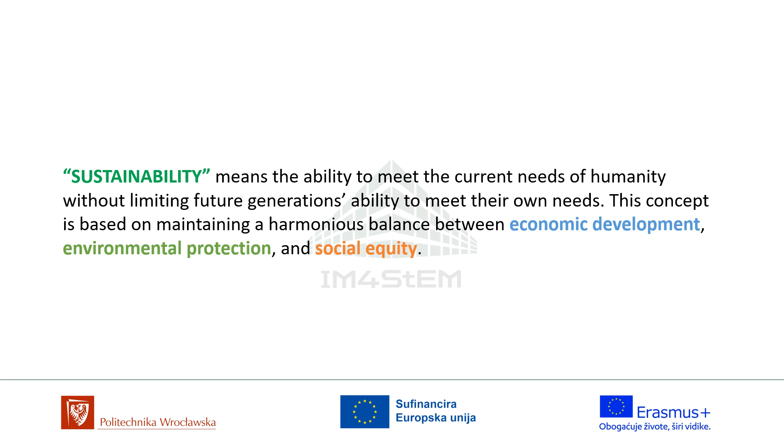Here you can see those three core pillars: the environmental, the economic, and the social pillar. As engineers, we sometimes fall into the trap of focusing exclusively on technical efficiency or environmental metrics. However, in the real world, a solution cannot survive unless all three aspects work in complete harmony. They are interconnected, and a weakness in one pillar directly undermines the success of the others.

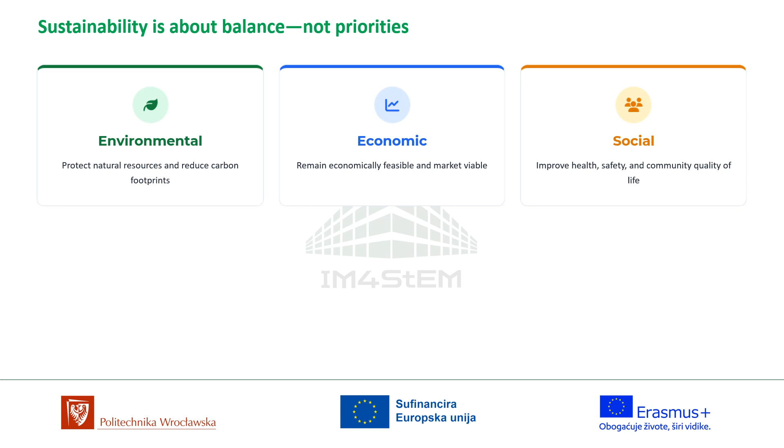To illustrate this, let's consider a real-world scenario. If we develop a material that is environmentally perfect, but it costs five times more than traditional options, the market will simply reject it. On the other hand, if we focus purely on economic profit, we risk devastating local ecosystems and running out of natural resources. Finally, a project that lacks social acceptance or community support will quickly run into regulatory and public resistance. That is why we must actively search for the sweet spot right at the intersection of all three spheres.

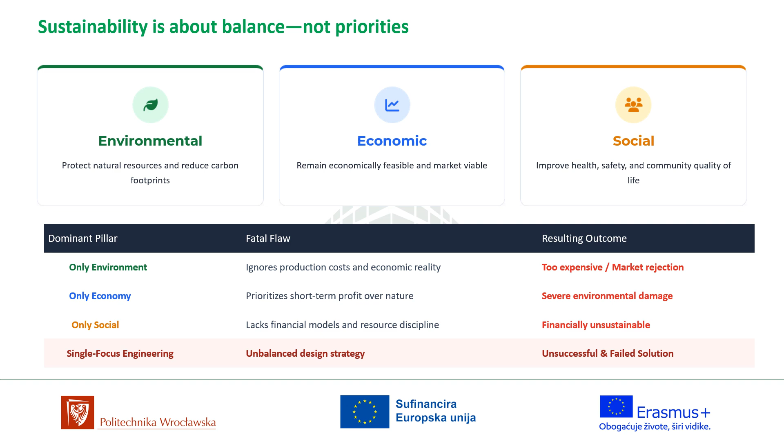This balance brings us directly to the concept of the circular economy, which is replacing our traditional industrial model. Ever since the Industrial Revolution, humanity has relied on a linear model: we extract raw materials, manufacture products, use them, and then dispose of them in landfills. Today, we know that this linear approach is unsustainable because our planet's resources are finite. The goal of the circular economy is to close this loop by transforming end-of-life waste back into high value secondary resources.

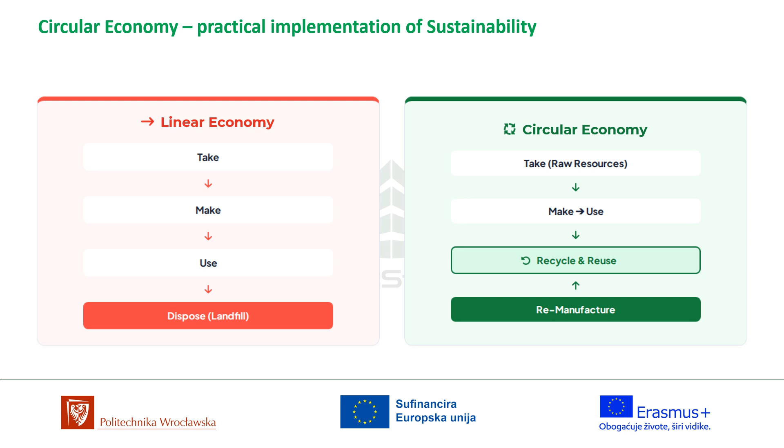Why is the construction sector such a crucial player in the circular transition? The reason is simple: construction is literally the foundation of modern human civilization. We build residential homes, commercial towers, bridges, highways, and heavy industrial infrastructure every single day. Because of its sheer scale, the choices made in construction have a massive global ripple effect. What we decide to build with today shapes the environmental landscape for decades.

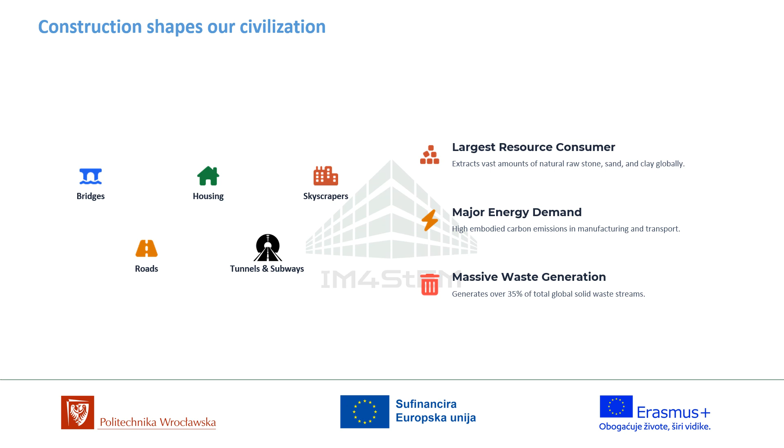However, this immense scale comes at a heavy environmental price. The construction industry is currently the single largest consumer of natural raw materials worldwide and consumes vast amounts of energy. As you can see below, the sector is responsible for over 35% of all solid global waste generation. From initial raw materials extraction to final demolition, we generate a massive amount of construction and demolition waste.

Our buildings generally consume an enormous amount of natural resources. Instead of letting them accumulate as waste at the end and end up in landfills, it must become our primary target to recycle them.

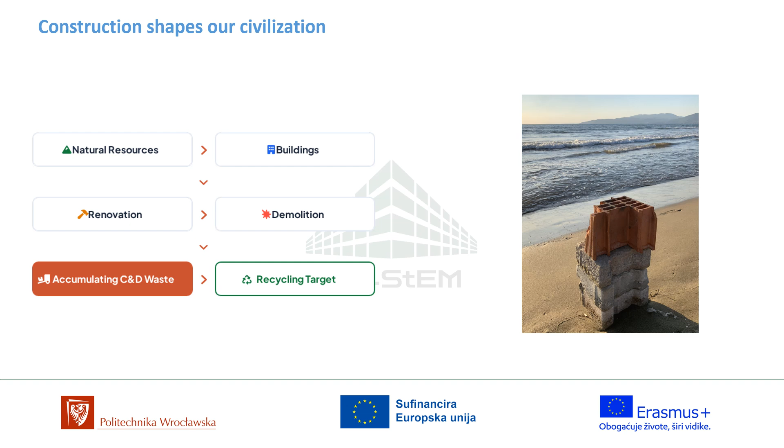To address this problem, we need to understand where all this waste actually comes from throughout a building's life cycle. We have to look closely at three main drivers: new construction, aging building stock, and frequent renovations.

In new construction, waste is generated right from the start due to material offcuts, damaged deliveries, overordering, and improper storage on site, meaning materials often become trash before a building is even completed.

When it comes to aging buildings, time plays a critical role. As structures age, their materials degrade, energy performance drops, and many eventually reach the end of their design life. That makes structural intervention or demolition inevitable.

Finally, during renovations, a large amount of functional or semi-functional materials like concrete, old plaster, tiles, joinery, and partitions are stripped out to meet modern aesthetic or efficiency standards. Combined, these three stages continuously feed massive streams of material into our waste management system, which is precisely why targeted recycling is so urgently needed.

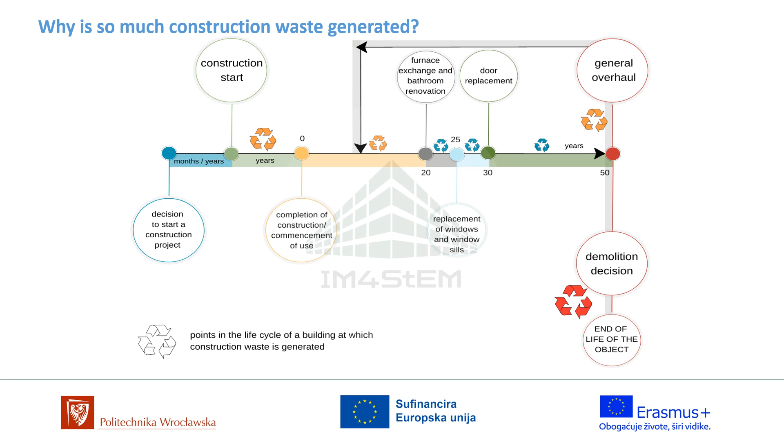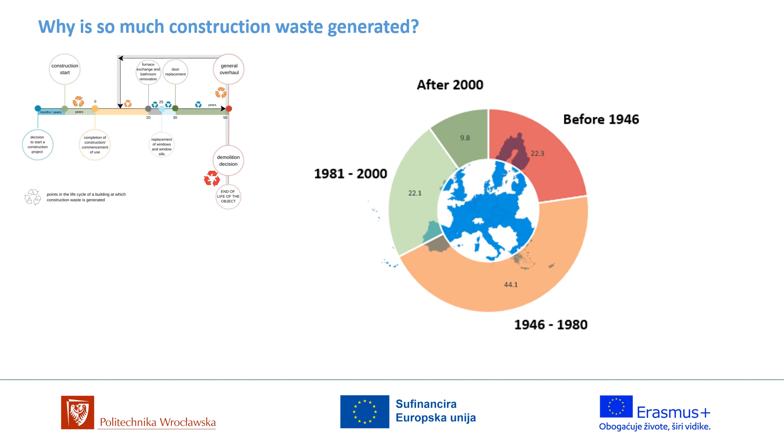However, when we overall analyze the composition of solid waste, we find out that construction demolition waste accounts for roughly 30 to 40% of total volume. It's a massive quantity that can be recycled or reused in the future.

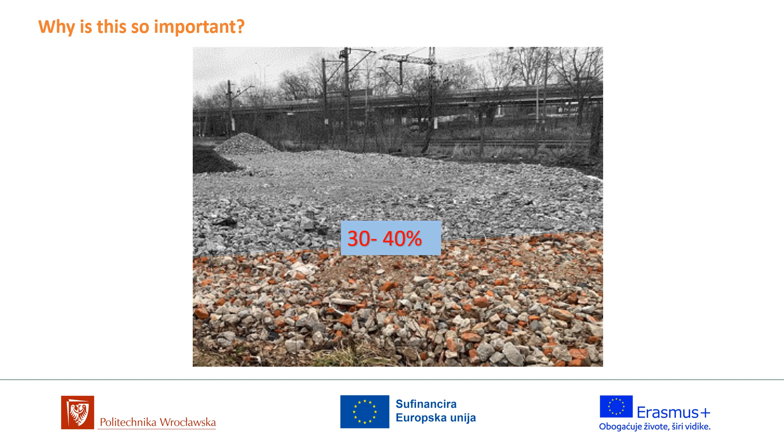When we inspect further a typical demolition site, you are confronted with a highly complex mixture of materials. You will find crushed concrete, glass, scrap metals, timber, plastic insulation, or even gypsum boards. Sorting and separating these mixed streams presents a significant logistical and technical challenge for recycling facilities. Without proper sorting, most of these materials end up being discarded together in landfills.

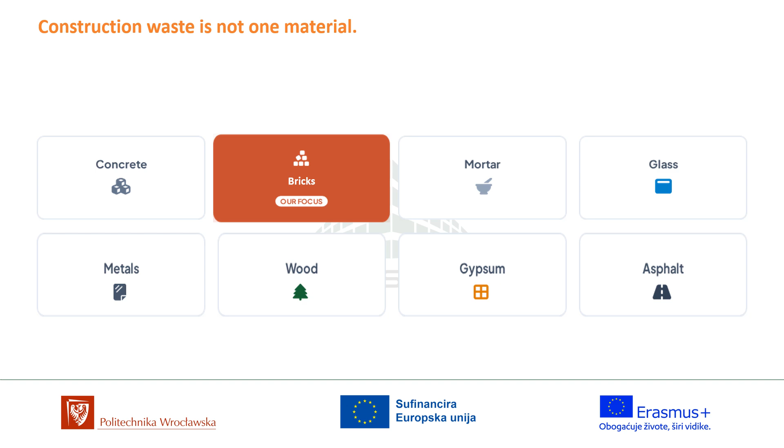Now, moving further to the masonry units and the waste bricks itself. To appreciate why this waste is so abundant, we need to look briefly at its rich technological history. Clay brick is one of the oldest manufactured building materials in human history, dating back thousands of years.

Ancient civilizations recognized that molding and firing natural clay produced an incredibly durable, weather-resistant block. As a result, brick became the primary structural material for cities across the globe for millennia, until the time concrete was invented.

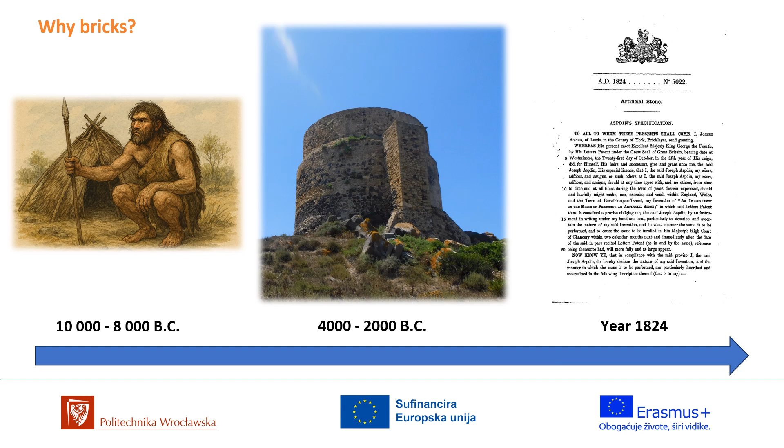When we look particularly at the history of construction of masonry systems, it has constantly evolved alongside human technology. We started thousands of years ago with raw natural stones, moved to fired clay bricks, and today we utilize highly engineered novel masonry units designed for high thermal and structural performance.

However, throughout all these eras, the core engineering principle of assembling modular units with a binder has remained unchanged. Understanding this technological evolution helps us see how recycled brick aggregates can fit directly into new generation masonry products or other non-structural materials.

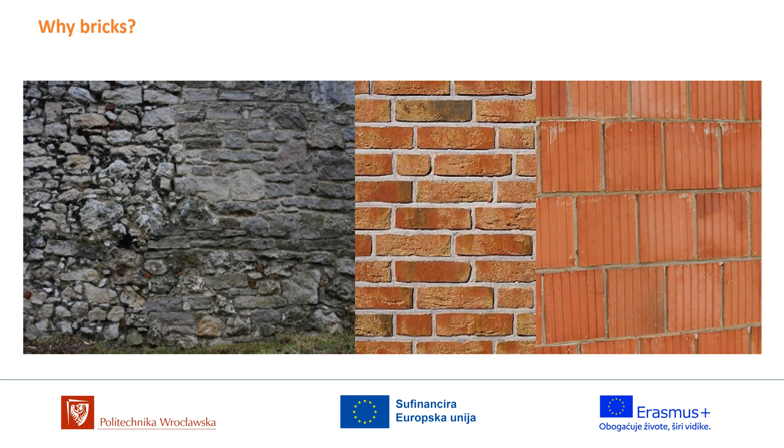To understand why red brick is such a fantastic candidate for recycling, it's due to its fundamental material characteristics. Firstly, durability. It provides long-lasting performance with minimal maintenance regarding mechanical wear or strength. This means that even after decades of structural service in a building, the ceramic material itself retains most of its original structural integrity.

Secondly, fire resistance. Because bricks are synthesized through a high temperature firing process during manufacturing, they are inherently non-combustible and can withstand extreme thermal shock without losing structural capacity.

Third, maybe the most important in the beginning, thousands of years before: local availability. Historically, clay pits were accessible nearly everywhere, allowing communities to manufacture bricks locally. It minimized transportation emissions and established brick as a primary building material worldwide.

Moving further, thermal mass: brick structures possess high heat capacity, allowing them to absorb, store, and slowly release thermal energy, which naturally regulates indoor temperatures and reduces heating and cooling demands. This is very often observed in old churches or other heritage buildings.

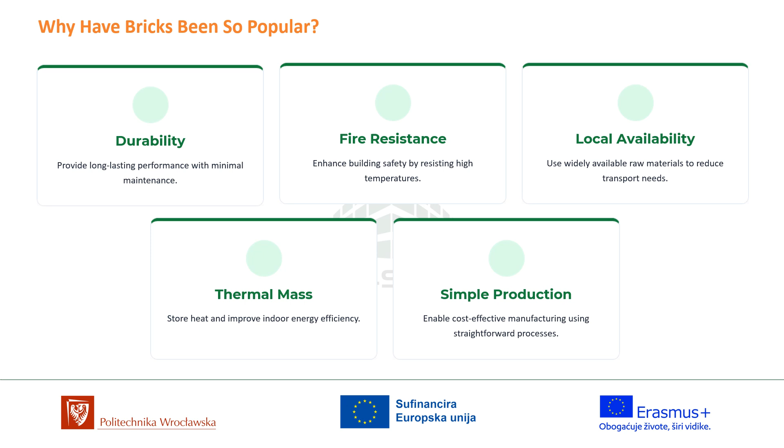Unfortunately, besides this, currently look at what may happen to all brick masonry at its end-of-life stage. Despite the high material quality of fired clay, current industry practices are still largely inefficient and unsustainable. A massive proportion of brick waste simply ends up in landfills, where it takes up valuable space and contributes to environmental degradation. Even when brick rubble is reused, it is typically directed into low-value applications, such as backfilling for excavation, terrain leveling, or as a crude substrate layer under roads and parking lots.

In engineering terms, this is a clear case of downcycling. We are taking a highly refined, fire-tested, and durable ceramic material and degrading it into cheap ground filler. This approach completely ignores the chemical and mechanical value of the material. Instead of treating crushed brick as a waste burden to be dumped or buried, our goal must be to shift from downcycling to upcycling, reintegrating this secondary raw material into high-performance structural composites.

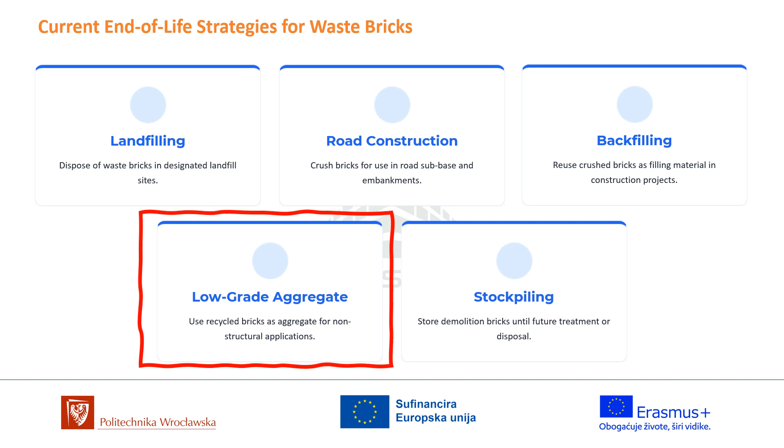How can we implement this approach? The process must begin right at the demolition site, with selective dismantling and rigorous material sorting. Once separated from contaminants like wood or other organics, the brick waste undergoes mechanical processing using heavy crushers and industrial sieves. This allows us to process dirty rubble into clean, well-graded ceramic aggregate, or fine brick powder with precisely controlled particle size. Then we can move further to integrate it into various composites.

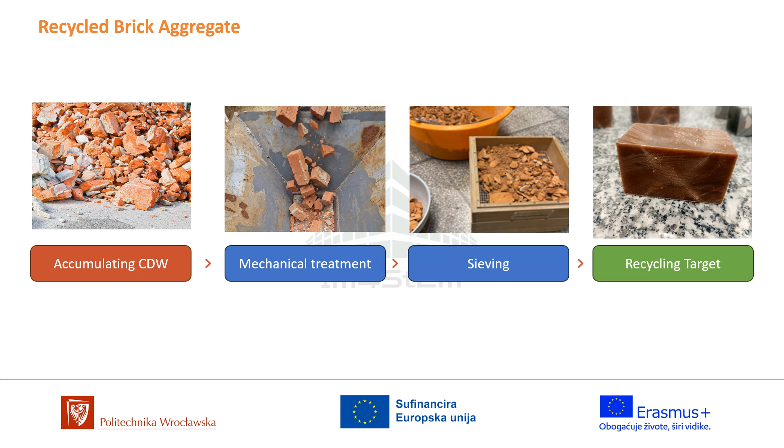Now let's look at potential examples of how we can use them in composites. There are three main types of composite pathways available. First, cementitious composites, where brick replaces various parts of concrete itself.

Second, resin-based composites, which offer high strength and rapid curing. And third, plastic matrix composites, which combine recycled polymers with ceramic filler. Each of these paths addresses different engineering needs and opens up new market opportunities.

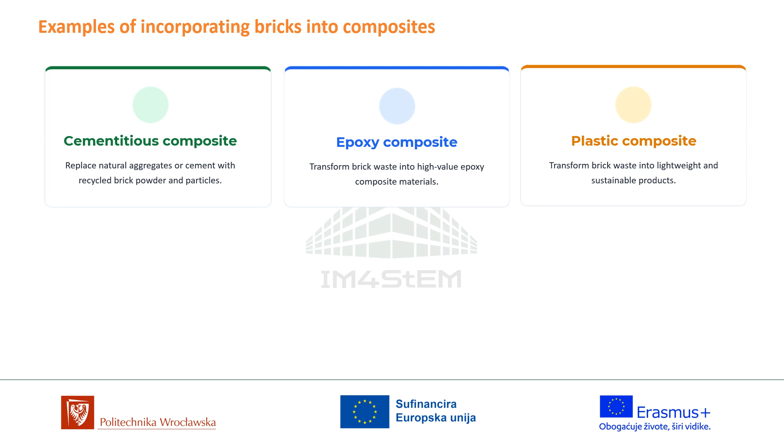For example, cementitious composites: since concrete is the most widely used construction material globally, integrating brick aggregate here allows us to absorb massive volumes of waste. By substituting natural virgin aggregates or cement itself with fine brick powder, this path directly lowers the carbon footprint of concrete and seamlessly supports circular construction on a large scale.

In the case of epoxy composites, this pathway focuses on value creation, turning low-cost crushed brick waste into high-value engineering materials. By using ceramic particles as functional fillers in epoxy matrices, we enhance mechanical performance and enable specialized high-strength structural and repair applications.

And third, plastic composites: here we achieve a unique synergy by combining two distinct waste streams, recycled polymers and brick aggregate, into a single sustainable material. This yields lightweight, highly durable products that are ideally suited for non-structural, weather-resistant building elements like pavers, outdoor tiles, or cladding panels. In short, each system serves a distinct market need, ranging from high-volume structural applications to high-performance specialist materials.

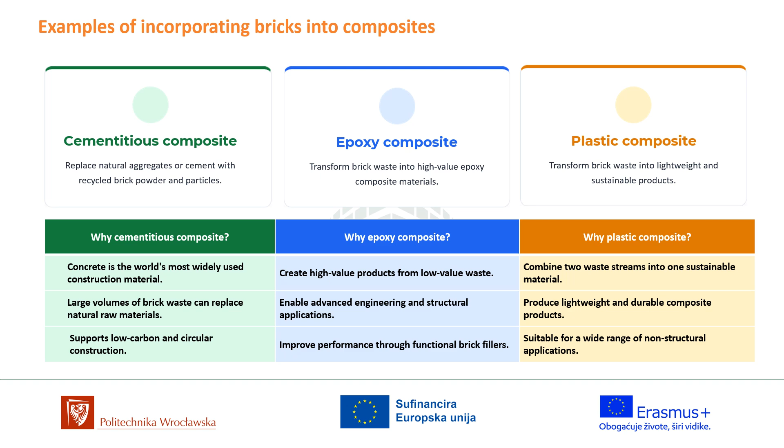Starting with cementitious composites: they basically consist of Portland cement, which acts as the main hydraulic binder; second, different types of aggregates, fine and coarse; third, water, which triggers the hydration process; and fourth, chemical admixtures or various other additives, such as superplasticizers to control workability, water and cement ratio, or other fillers to make the cementitious mixtures denser.

Together, all of these ingredients create a sustainable concrete matrix that can use other recycled materials, like for example fly ash or others.

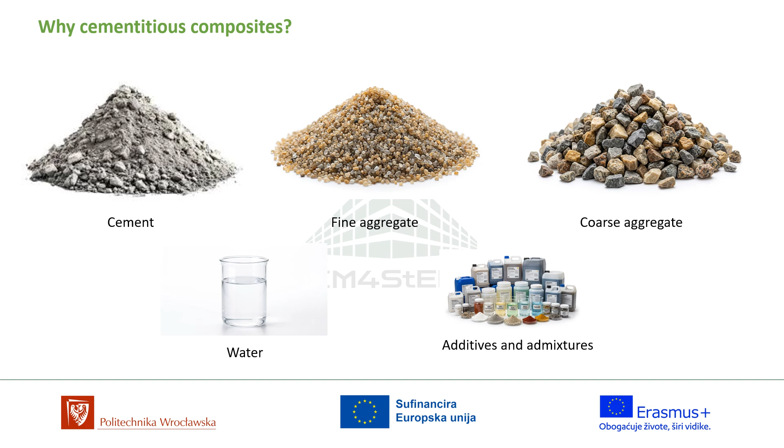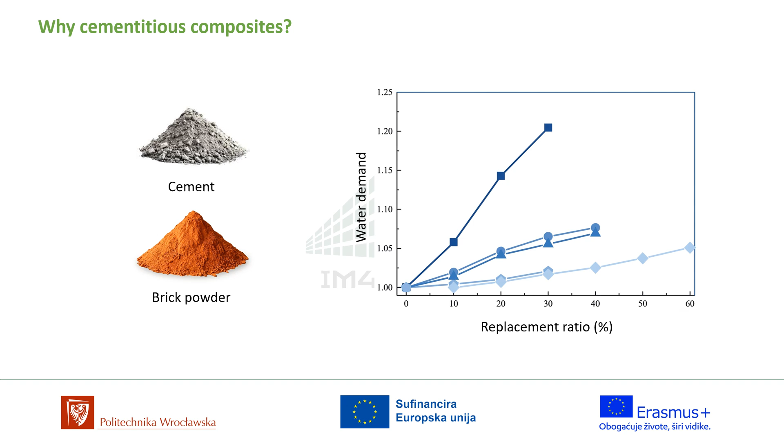When we look, for example, at another option, replacing fine natural aggregate with fine brick aggregate, it yields very promising results in terms of compressive strength. In various compressive strength tests done throughout the world and gathered from literature surveys, the fine brick particles sometimes stay at the same level as the reference mixture, or sometimes even exceed it in some examples. Although it has to be pointed out that in those cases, the reference mixtures themselves were different, so these results are only preliminary.

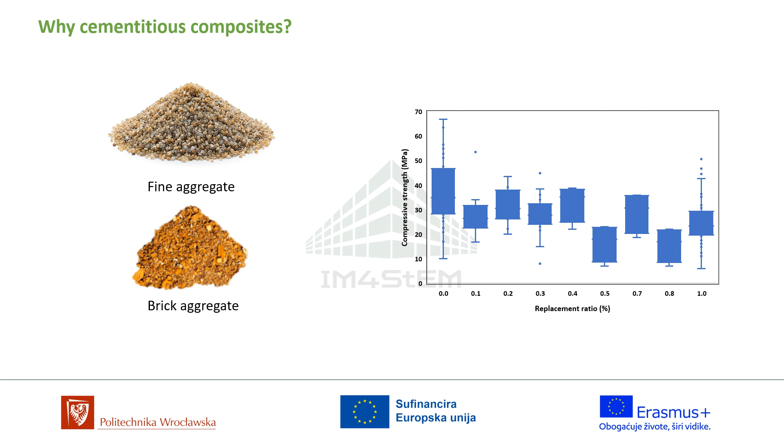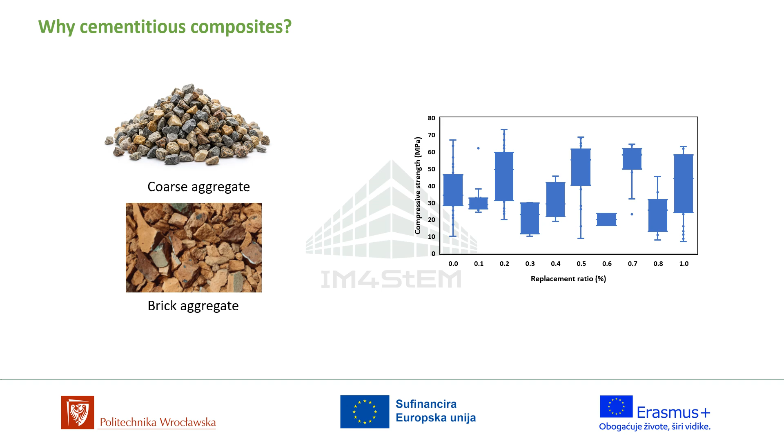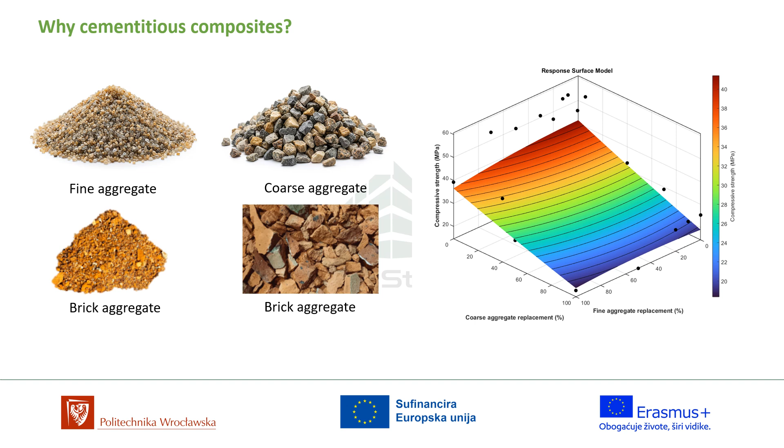Now, let's move to our second innovation path: epoxy-based resin composites. While cementitious matrices are traditional, polymer matrices offer unique advantages such as ultra-fast curing, complete water impermeability, and extreme chemical resistance. In this research, we investigated using coarse recycled brick aggregate as a structural filler in epoxy.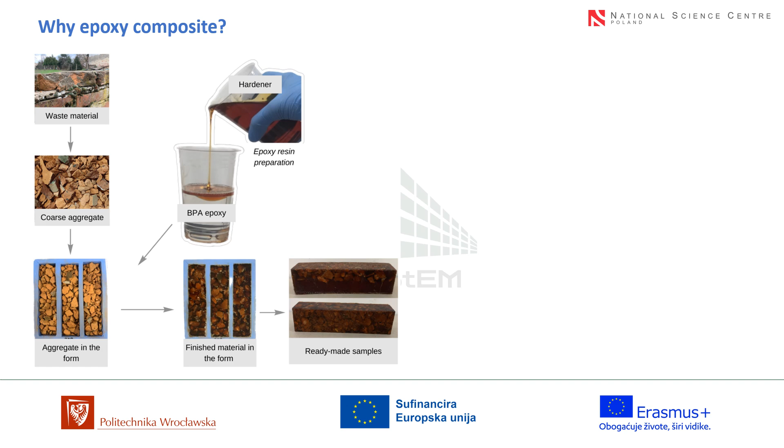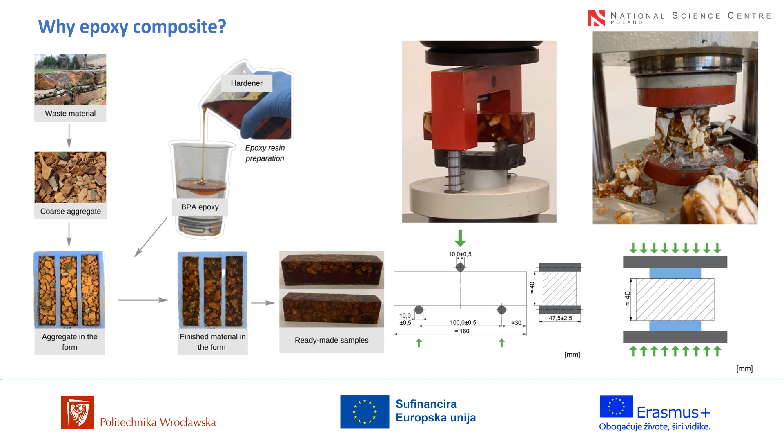Furthermore, we subjected these epoxy brick composites to mechanical testing. The performance was outstanding. The flexural strength results demonstrated that the ceramic particles form a very strong mechanical interlock with the polymer matrix. This also results in numbers where the bending tensile strength is much higher than typically for concretes. Furthermore, the compressive strength of these epoxy brick composites exceeded 50 megapascals and sometimes reached up to 60. This incredible mechanical capacity opens up high-end structural applications, for instance, heavy-duty industrial flooring, chemical-resistant linings, structural repair mortars, and high-precision precast elements.

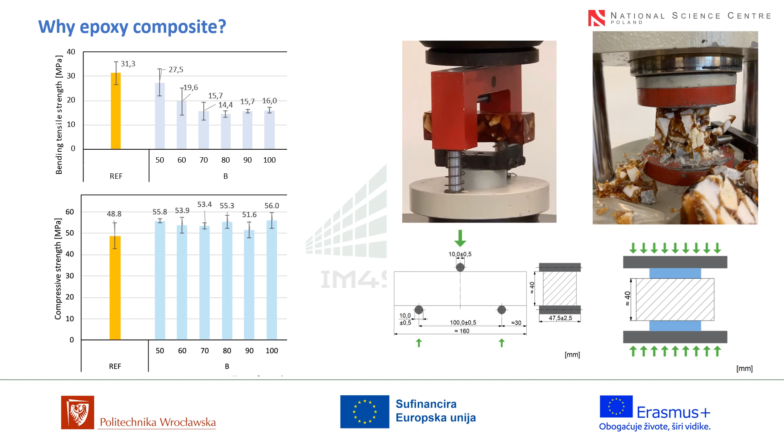It explores combining recycled brick aggregate with recycled thermoplastic polymers, such as polyethylene or acrylonitrile butadiene styrene. This approach is particularly exciting because it simultaneously addresses two major global waste problems: construction demolition waste and post-consumer plastic waste. We are talking about two problematic waste streams, fusing them into a new composite material.

The manufacturing process involves compounding shredded plastic with fine brick aggregate at elevated temperatures. The polymer melts and coats the ceramic particles, acting as a continuous binding matrix. The temperature is not so high that it affects the waste brick aggregate at all. Once extruded or compression molded into shape, the composite cools into a tough, water-resistant solid block.

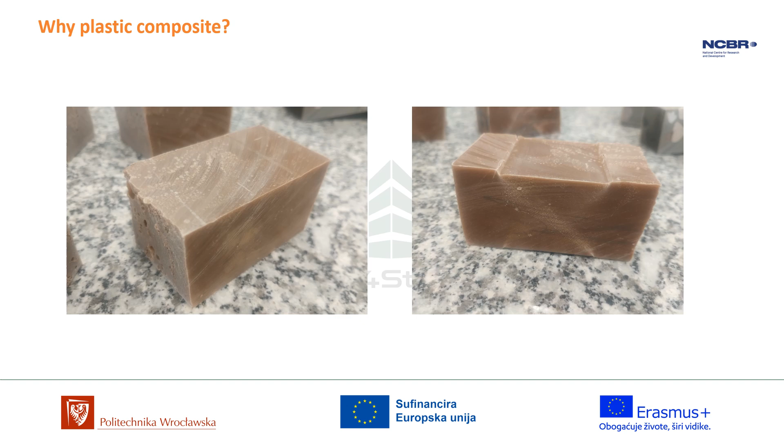Similarly, performed tests provide promising results. Looking at the experimental test data, this plastic-brick composite exhibits remarkable mechanical characteristics compared to mortars, for example. Formulation with polyethylene achieved compressive strength exceeding 40 megapascals, and bending strength up to 30 megapascals, which is much more than for concrete or mortar itself, about 6 times.

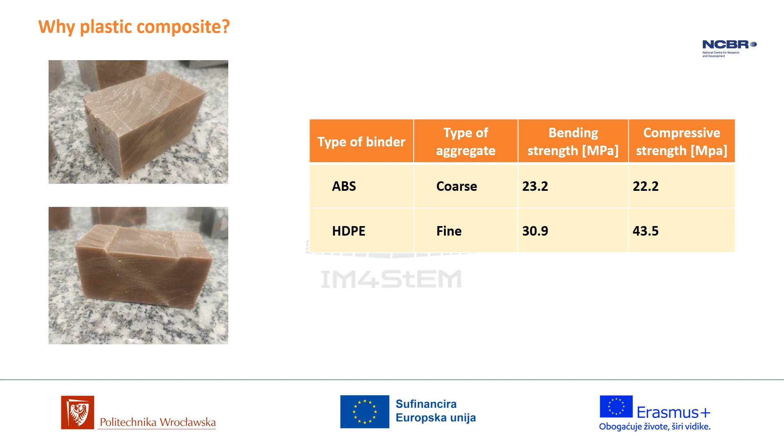As we begin to wrap up today's presentation, let's revisit the sustainability triangle we introduced at the very beginning. The ultimate question for any engineering innovation is: does it truly deliver balanced benefits across all three sustainability pillars?

We may try to answer these questions, stating that, first, demolition brick waste holds immense potential. Its intrinsic fire-resistant durability and high thermal mass make it a prime candidate for circular construction materials rather than simple backfill. Secondly, published research also demonstrates that there are some promising technical pathways to use waste brick aggregate in various composites, each offering unique avenues to absorb ceramic waste.

Third, data synthesized from those studies prove that it might be very beneficial to use construction demolition waste as a filler in various composites. However, whether these upcycled composites can fully meet all structural and long-term durability expectations in real-world applications still remains an open question. Moving forward, extensive field testing, standardized guidelines, and industrial scaling will be essential to turn these literature-backed possibilities into everyday engineering realities.